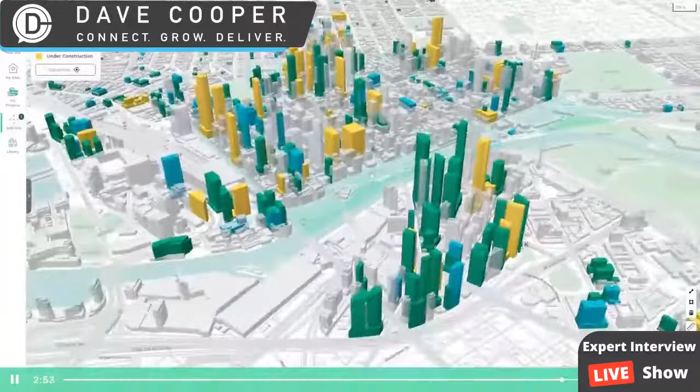Hey, so this is what we're going to see, and you're going to design it just as quickly as we did in that video, right? 100%, probably faster. Well, before we jump into it, Dr. Ben—that's what I'm going to call you, Dr. Ben. I was saying, do I call you Doctor? Do I call you Ben? Do I call you Dr. Ben Benjamin Coorey? But you said it doesn't matter to you, and that's what I love. You're a humble person, and you're a lot of fun to talk to.

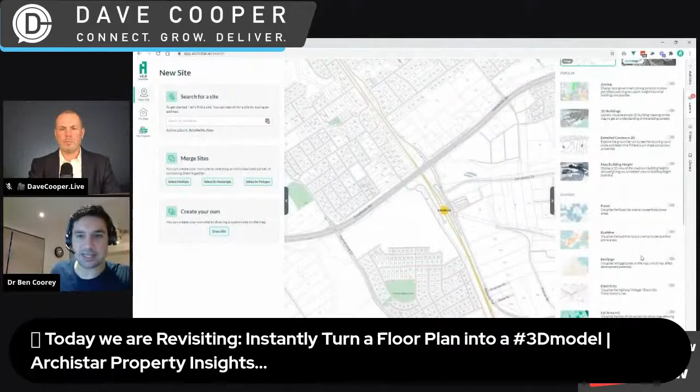So from that, what we've done here with this data visualization is, it's really an open platform, and at the moment we've brought in key data sets that we think are useful at this stage. But based on the feedback of our clients, what we've been doing is...

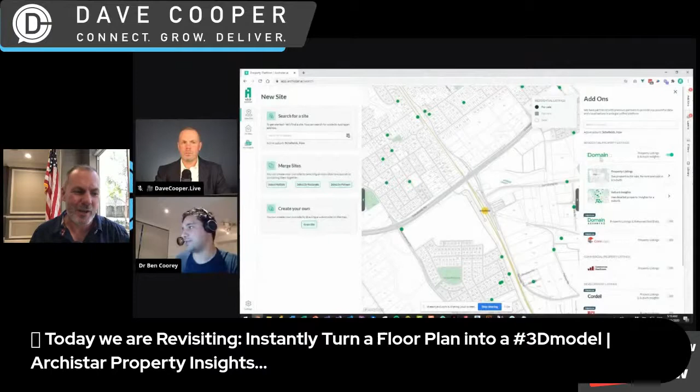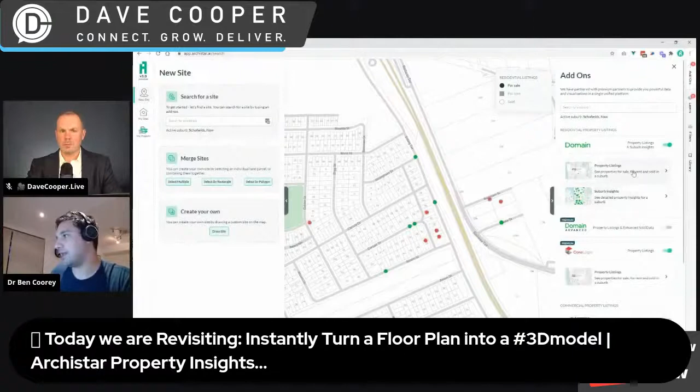Once it's done, we bring in all of these data layers, and we're looking at the equivalent data sets in the US - real estate portal listings, so you know exactly what's on the market. You can grab suburb insights on the spot and see what the median sale price is, how that price has changed over time, how many apartments or houses have been sold. All of this information is at your fingertips.

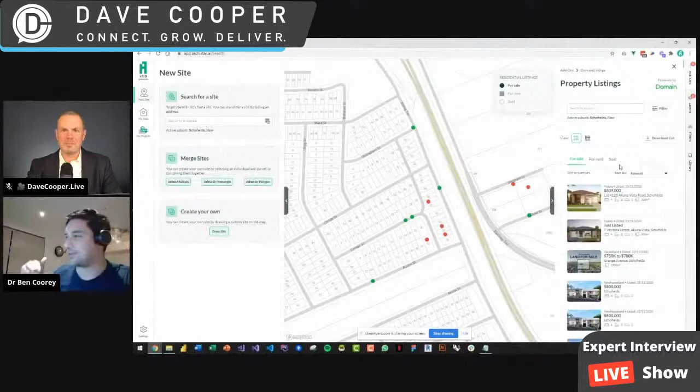We're data nerds here as well - we design, but we love data. Bringing up this data and looking at it in tabular format, exporting it, searching, filtering, working through this - if you're getting into property development, or if you're experienced looking at a new area you haven't looked at, this stuff is critical. You're seeing the date properties have sold, how much they've sold for, what's on the market now, what's for rent, what's been sold - you're becoming the expert in these areas, and learning how to develop there.

The more information you've got here, the better. There's information about the market, information about development activity. If we pull this up, you can start to see straight away what's been approved around your site, and this is super important. If you click on any of these, you can see a development site, residential or commercial, what's been put up there, what's been approved. Here's another development site - a mixed-use development, 242 units, 5 stories of retail, and the value of that property.

So this is all the activity happening around you, and that's super critical, because what you want to know is the settlement risk. What's happening around you - if you're going to develop somewhere, are there already 10 commercial buildings popping up around you? Is there stuff in the pipeline you need to be aware of? Bringing that data together really brings market activity, development activity, and zoning activity all into one spot.

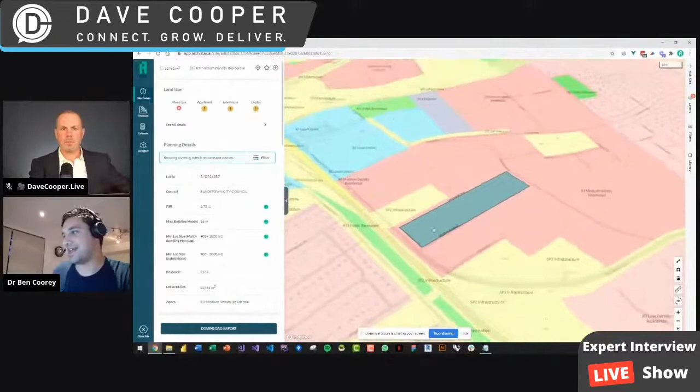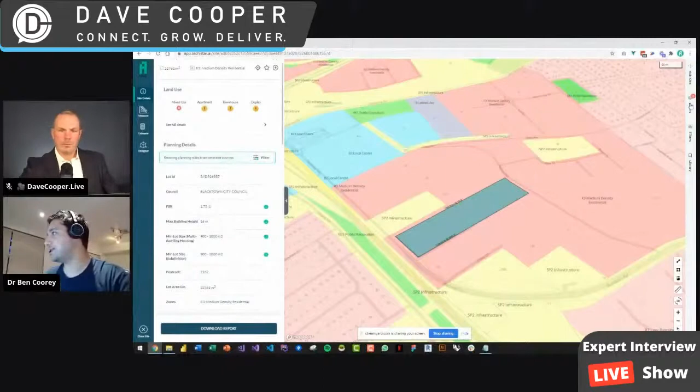I think that's the part which is different from other generative design companies—we've powered you with all these data sets. If you're looking for a site, we've got powerful filters so you can say show me everywhere I could build townhouses or apartments, and it'll show you exactly where you can do that. So let's go to a suburb and turn on where we could put apartments.

If you look here, there's apartments, and this filters on where you can put townhouses, where you can put apartments. You can use this data to really filter and say show me sites that are between this lot size and that lot size—straight away going in here.

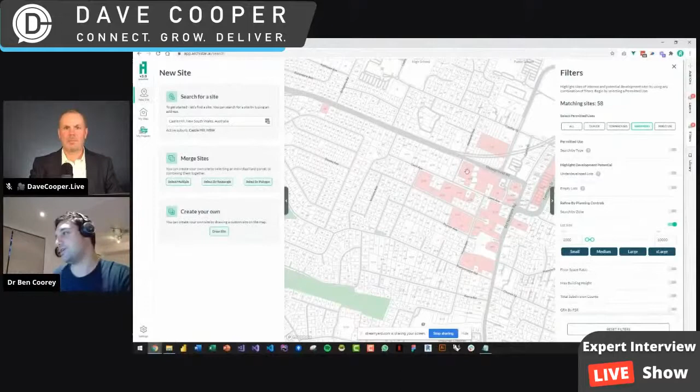The beautiful thing is one of our add-on partners is an aerial imagery provider that gives you up-to-date, super high-res aerial imagery. These are opportunities available for zone for apartments, and you can see a lot of these are already done. But if we go back to that filter and say show me the smaller sites—bang, straight away you see all these little sites here.

These sites haven't been built out yet, which is really cool. So you can say, look, these have all been built out as apartments, but look at all these opportunities around that I could potentially develop too. Really powerful, combining the data and AI to find sites—combining those planning rules with powerful filtering and an AI engine so you can get this up and running and identify those sites quickly.

So now, taking that first part of the process—can we use data to find sites and generate designs—the next bit is, well, what do we do with those sites and what can we do there? So I'm going to come to some examples over here.

Let's look at this one here. So here is a site next to a train station. Transit-oriented developments are all the craze now, so what can we do around here next to this train station? We've got all this open land—what can we do here?

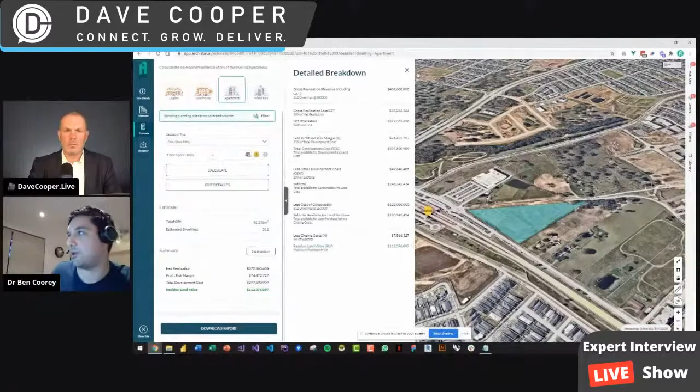This is your Excel sheet that, with some basic planning rules, lets you immediately put in the cost of the development, the revenue you're going to make, and you end up with a residual land value—how much profit you want to make, how much you could purchase that land for. So the back-of-the-envelope sketch is digitized now: you put your rules in, your costs in, and you've got that straight away.

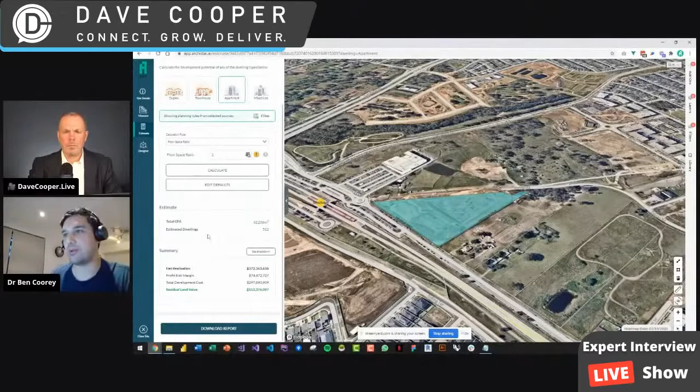But where the real power comes in—and this is where my PhD and all my work came into it—is the designer button here. This is live, this is instant, this is what we've got in the platform. We've got a team working on design strategies every day, populating this and adding more and more typologies. If you look here, these are all the different typologies we do.

Let's pull up a nice commercial option here on the train station and see what's possible. Basically, you hit generate, and these are all the options you can play with here. You'll see this come up, and you can mess with these parameters—this is the whole point of generative design.

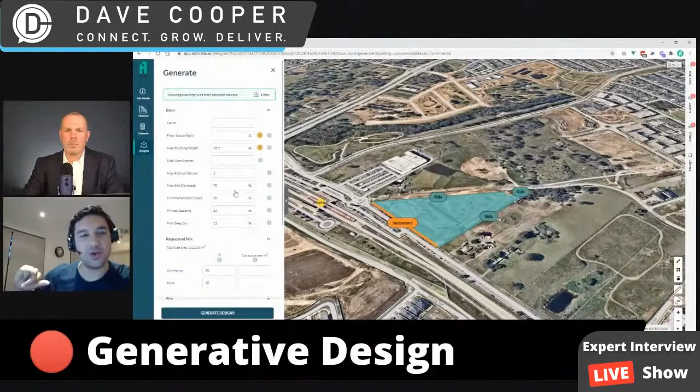What's the maximum building height? What's the number of podium stories you want? How much site coverage, how much open space? What's your privacy spacing? What's the mix between commercial and retail? What are the offsets? We populate these with planning rules—you see a tick if it comes from the planning rules—but you can mess with these and change them on the spot to test out different options.

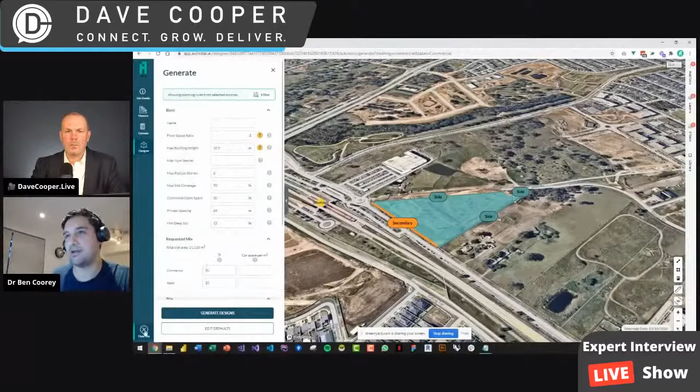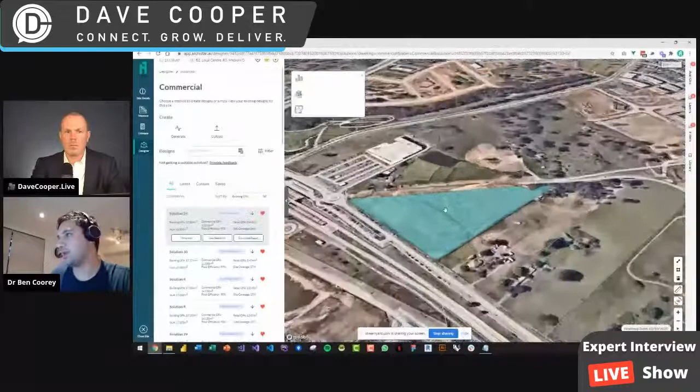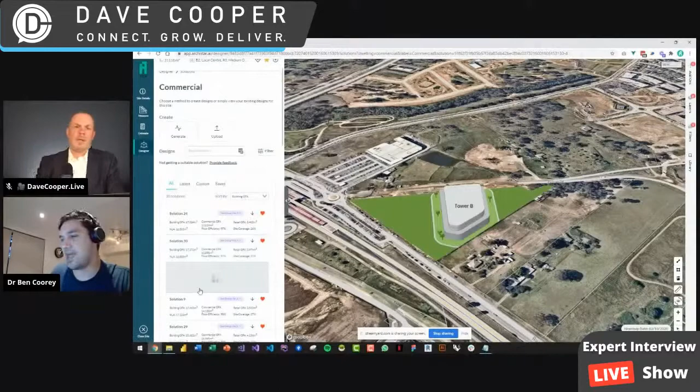So if we go to that and we generate some designs, you're going to see it load up some solutions working through here. Straight away you'll see designs popping up, and immediately you can start cycling through them based on the settings you've done.

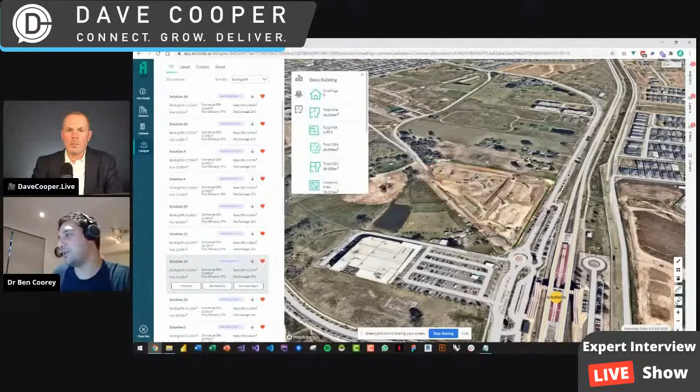It's going to test out a whole range of different options and show you how that will fit. You're working from the street frontage, trying to see how this works, and it's giving you a whole range of options that really start to show what's possible. For all of these designs, we go further and show you the inside.

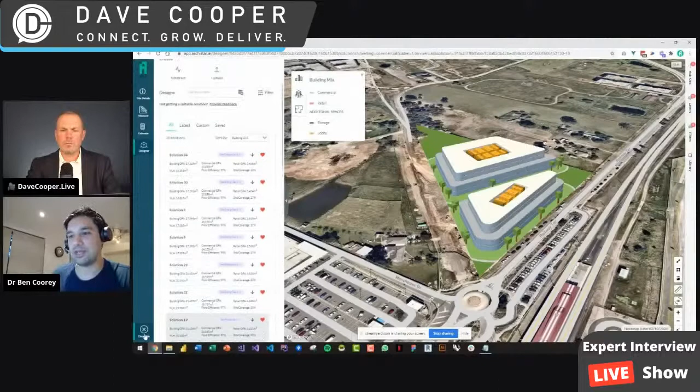So when we're generating this, you've got that concept level, but we're designing further. We're designing the lift cores, the corridors, the facades, and we've really got that level of detail where you can design in there, and go into feasibilities and get your lot schedules and all of that out straight away.

And if that's a commercial site, we work on so many different options. Here I'll show you another site, and you can start to see what's so powerful about this engine is these sites are crazy shaped designs. Look at the shape of these sites. Our parametric engine handles all of those different shapes, and that's what's made it so difficult.

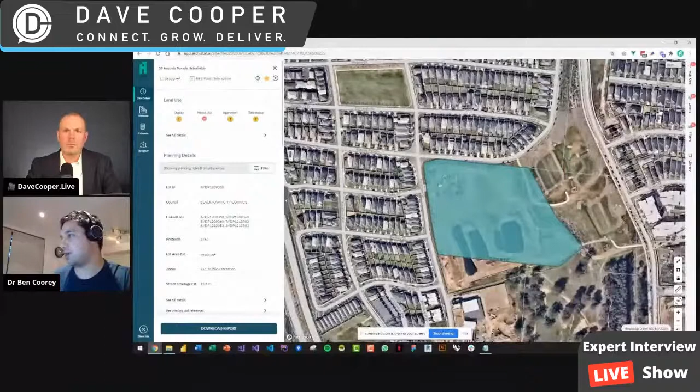But here's a nice open paddock, in a bit of subdivided land. You go over to townhouses and start generating that, and we come up with solutions that meet and wrap around that site. It handles the geometry of the site and comes up with these solutions instantaneously, with a lot of options.

Going down this list, there's a whole range of different approaches to how you would do that. At the click of a button, you've got these options, and all of these townhouses and house designs are to the exact spec that you've said. This is the right GFA that you want. You're getting variation in, but you're thinking about the site: what are the rules, how big do the roads have to be, and how many lots can you get there.

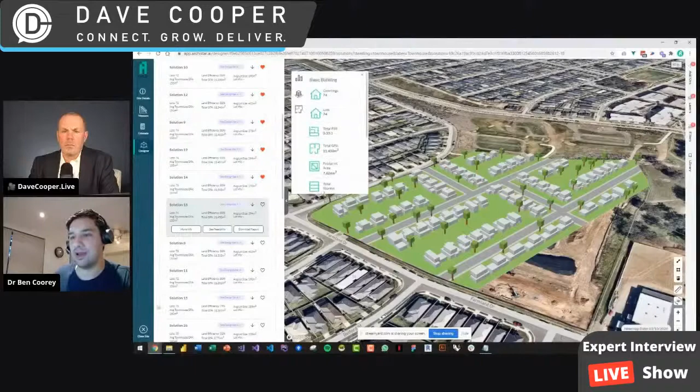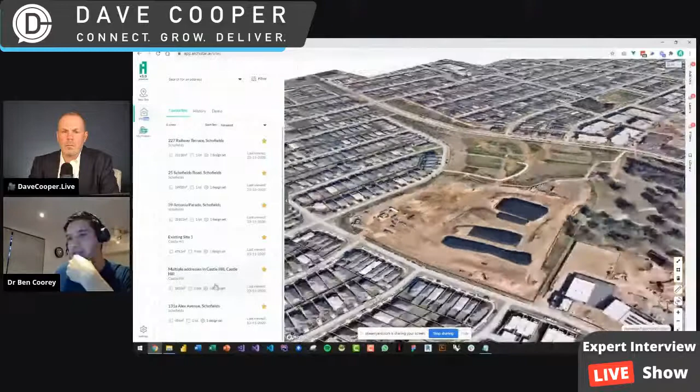Instantaneously. And I'll show you one more before I move on to something else. If we go to the apartment generator...

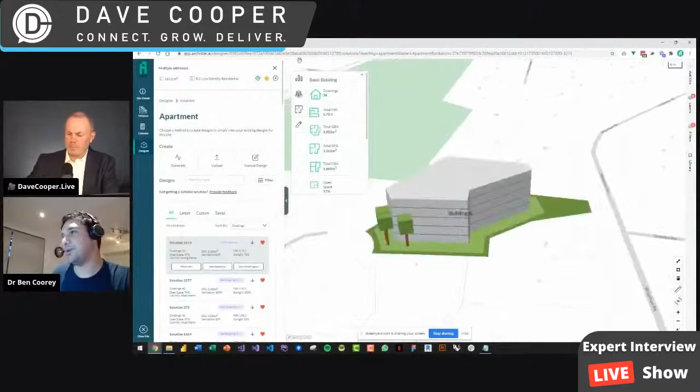This one is really cool, where you can now start to actually analyze all these options you get. This is super cool. So if you go into the apartment generator, you can look at that building mix and see those individual apartments in here, which is super awesome.

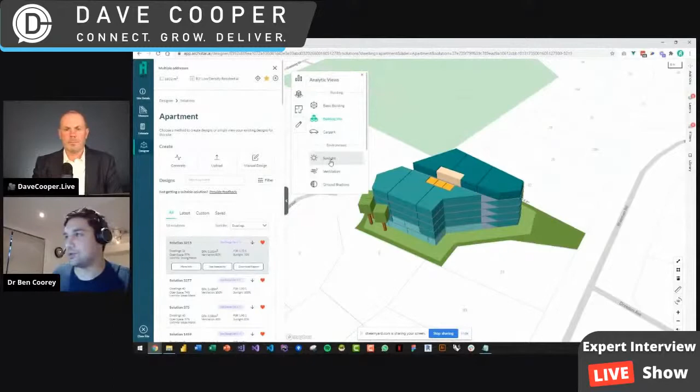But this is the cool part: all of these designs are analyzed for solar compliance and ventilation. So if you want to know which is the best option for how much sunlight they're getting, every one of these condominiums or apartments, we're telling you how many hours of sunlight each apartment gets and what that percentage is. These are calculated on every design instantaneously.

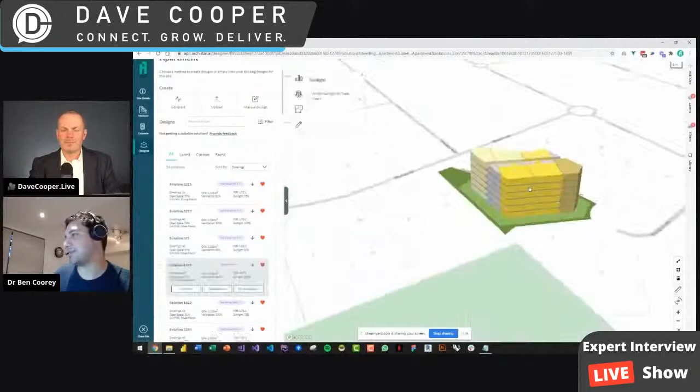So you're looking through these options and seeing exactly where the sun is coming from, seeing which ones work better. As you're working through these, you're not only getting the best mix from a feasibility point of view, but you might think, oh, I'll just put up a straight tower here, but these apartments get no sunlight at all, so maybe this is not a good option for you.

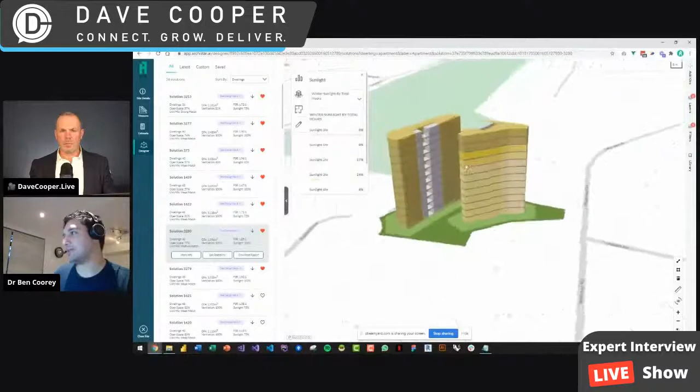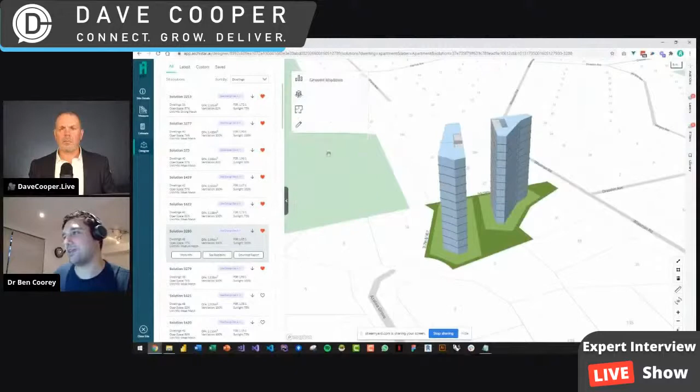So you're really working through really crazy innovative designs that our team keeps putting through. These are fully cross-ventilated designs. You can see shadows, and you can put on the existing buildings around you to see if you're overshadowing those buildings, and how this fits into the context.

So straight away, any hour of the day, you're going to start to see exactly where I'm shadowing. So yeah, it's a super powerful tool, and it's getting even more powerful every day as we do it.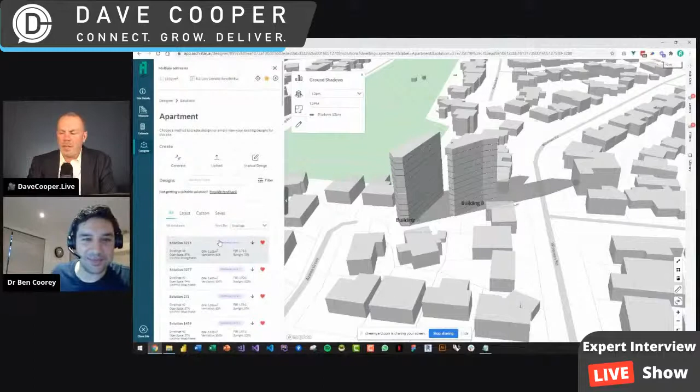So, to sum this up a little bit, Ben, I don't know how you keep all this data and this thought process in your head. It's a massive undertaking, the information you guys have put into this. But I'm going to ask a pretty simple, basic question: how do you get all this data in there from the zoning and regulations, all the town planning data? This has to be a pretty big undertaking, because you're literally letting people stay in their house - all of a sudden it makes me a zoning officer, an architect, a civil engineer, a plans owner at a very low level, of course. I know you still need those professionals when you get further in. Walk us through how you come up with some of this information.

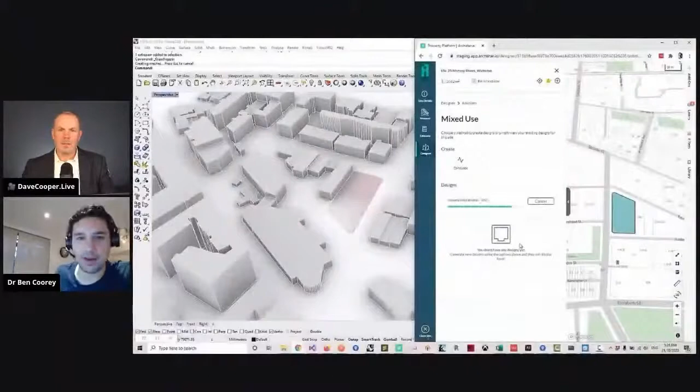Yeah, and I'll show you—this is like new footage just coming up. It's a good time to segue into that. We're very much about how do we integrate into the workflow. And I'm an architect by background—I teach technology in our academy.

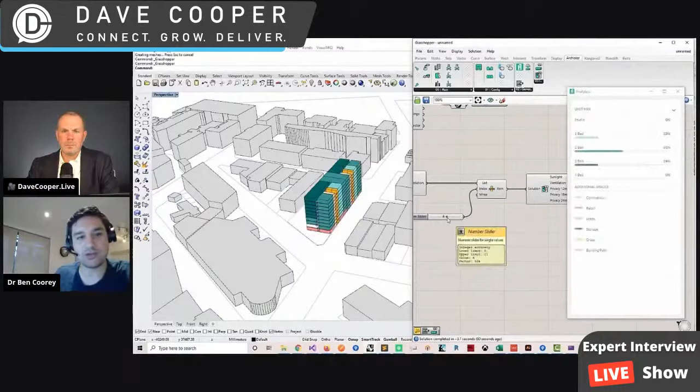So we've built this as a Grasshopper plugin. We're doing one for Revit and Dynamo. Essentially, anything that you design in Archistar on the web, you can stream that straight into Grasshopper or Revit and take it from there, start modifying it, and then push it back into Archistar for analysis.

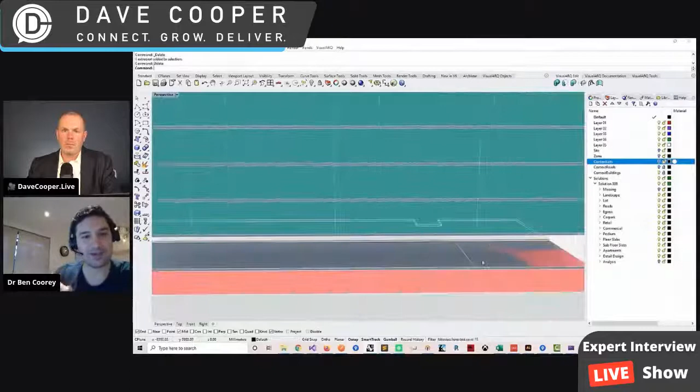And I think this is critical, right? Because whatever we come up with in Archistar—it's AI driven, it's generative design, here are examples—but if you want to really get in there and customize that, change how that looks, and really kind of take it to the next level, we allow you to take those designs almost as examples or concepts and then modify that and really change it. I think this opens the door to strong collaboration, and a lot of people say, how are the architects involved in this? How are the planners involved? How are the engineers? This starts to bring that together.

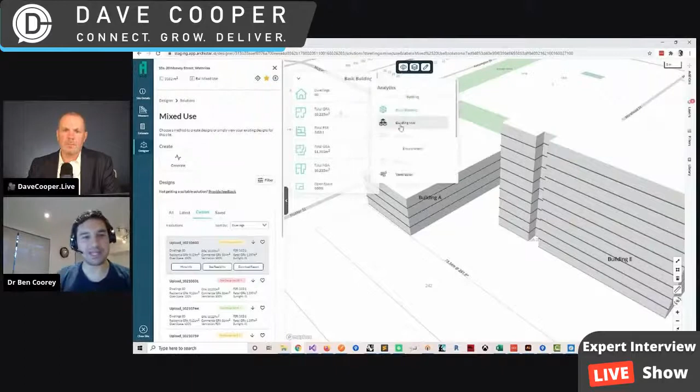So it's like, all right, here are your concepts—bang, bang, bang, I'm 80% of the way, but how do I then work with my consultants? Because you're not going to get a full design finished on the click of a button.

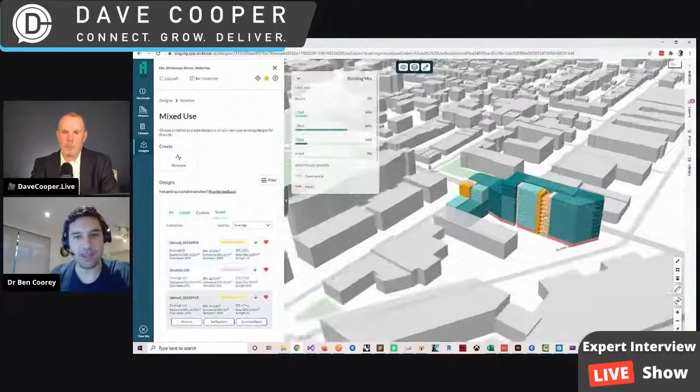You're going to get close to the idea that you want, but can you then take that out and work with your consultants to come up with that final scheme that's really tailored in? It takes into consideration all the different factors, and how fast can we do that by allowing that collaboration to work. So yeah, 100%, that whole idea of working into that workflow of the process is super important.

Wow, that's super cool. All right, let's keep going through some comments here. Jamie Parr, Joel Hutchins, nice loaded question. Mr. Revaya can help you with that. Yes, he can. Everybody doesn't know Joel. Joel is working on his own parametric and design stuff in the cloud, which is great, great, great. Did I get that right? Parametric, Joel? Watch, he'll give me a hard time.

All right, so we've got Tom ready. Are you able to tie in the takeoff estimates for bidding or costing, and also the production and build schedules?

Yeah, 100%. So with all of these designs, we've got all the geometry, we've got all the information, we've got all the metadata. We can recreate that in BIM, we can recreate that in Rhino or any CAD software. We also pull out some basic data from that straight away. So if you want to know your GFA, if you want to know your dimensions, your lot schedule, we can pull that immediately. We can tie that into a feasibility calculator so that you can use that data to start estimating straight away. But I guess as we progress further and we get more of those details coming in, we can start to look at those build schedules and build quantities.

And at the moment, it's still that kind of conceptual level. So massing, we get down to more schematics of the unit mix and the corridors and the lifts, but we've got tests and experimentation of going down to walls, windows, doors, floors, but yeah, that's still in the works. Well, it's still very impressive, that it's even a consideration on top of everything you've already done. So I think that was a great question.

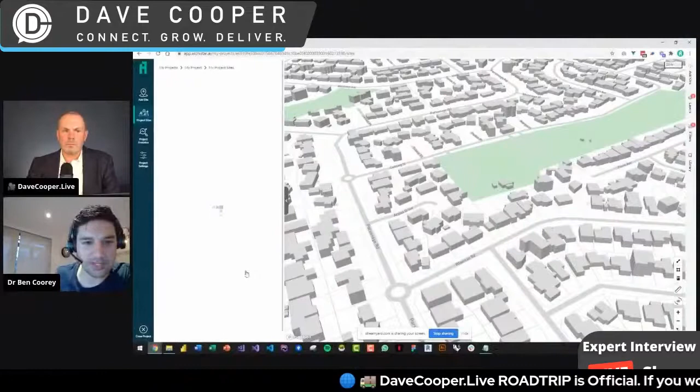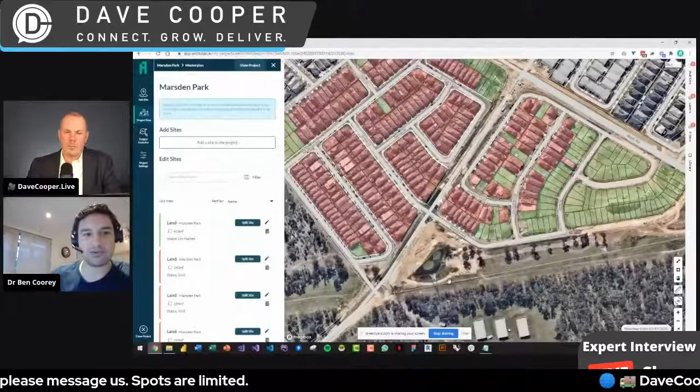We started going into, I showed you before we could do subdivisions and we could do those community estates. What we've really started to do now is started to work with the large home builder community and developers that are taking large estates, and they're looking at the process for how do we start to take this system and use that in the selling process, and can we speed up that process and encourage a richer experience there and faster sales here.

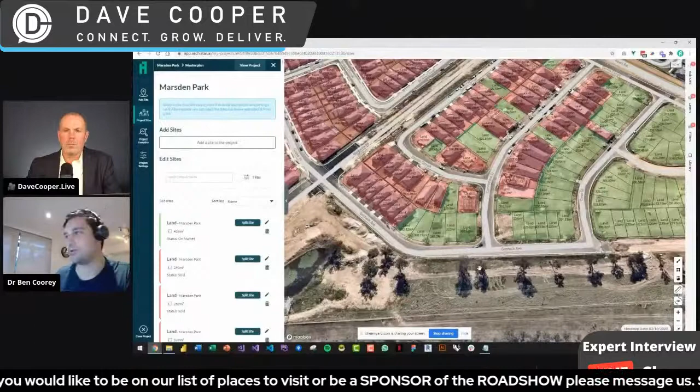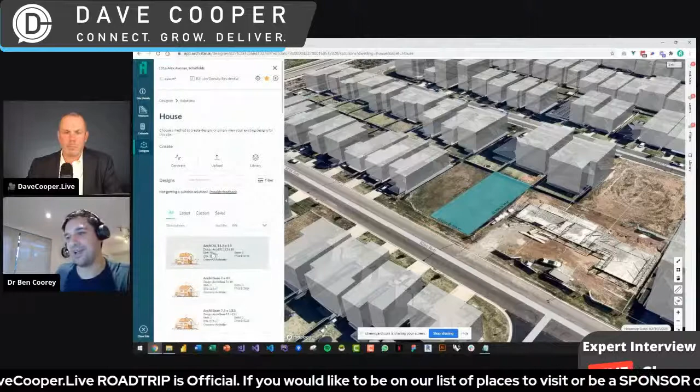So what we've got here is we've got a community that can be managed on the site, so you can see the designs that are being built, what's still available on the market for sale, what's been sold. But what's really cool about this is that you can now start to bring in not just that conceptual massing technology, but you can actually start to bring in real house designs that are 3D, that are visual, and that are fitted to the site.

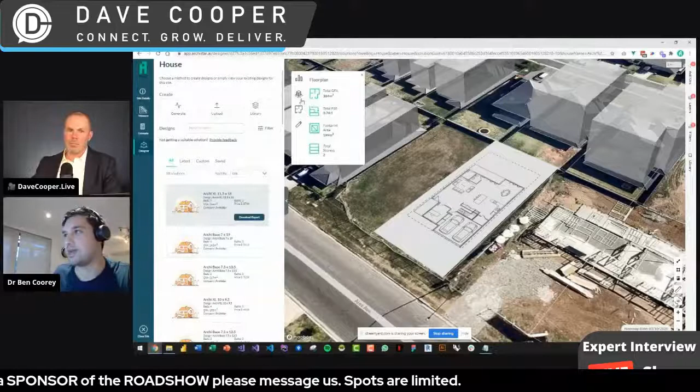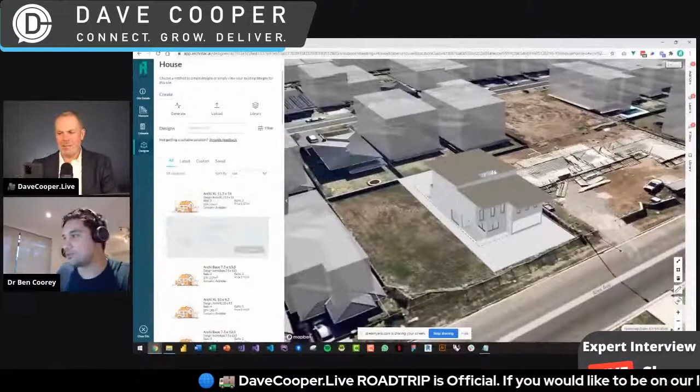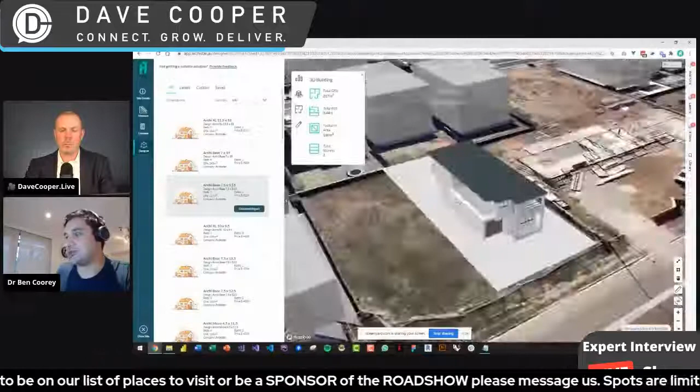So what you'll start to see here is that we take into account the planning rules. And if you've got a library of designs, of home designs that you've worked on, and you've got that catalog, we can upload them and we can actually fit them in so that out of all the designs possible, you can only choose the ones that fit into the design and are suitable for that site. So this has been a really powerful tool, and especially in Australia, where you do have a lot of choice on what home design you want on a piece of land, and you can often pick from a library of designs that a builder may have.

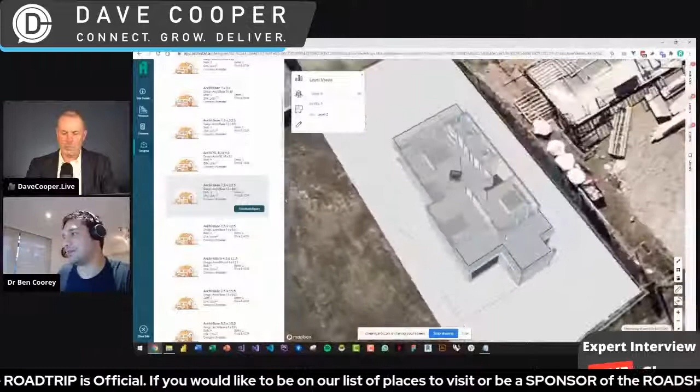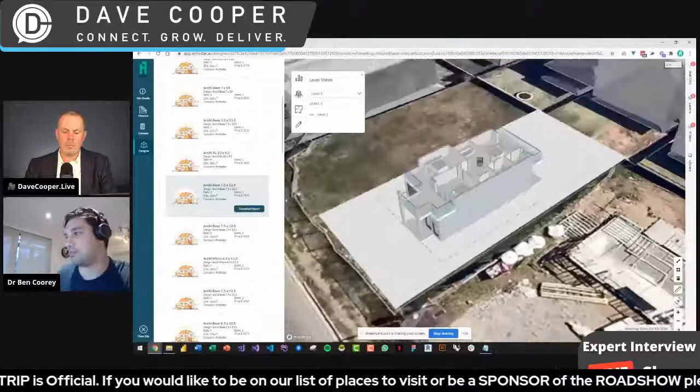This is really changing the game here, where you can fast track that, allow the control for the customer to really kind of get in here, explore the designs that they want, pick what they like. And even if you've got a large community, it may be as simple that you've got a few options to pick from. You want to pick that particular site, test out what options there are, and bang, I like that. So we're finding that this is becoming very useful as a sales tool as well. Once you've got your development done, can you start to work through that sales process and involve the end client into this? So there's a bit of a consumer play here, which is super cool.

You just keep adding on. I don't know, man, do you sleep ever? You just keep adding on. It's about 4 a.m. here. I think if you're a founder doing something global from Australia, I think sleep is out of the question, right? I know, so well, you know what, lack of sleep causes hair loss. I'm just telling you from experience.

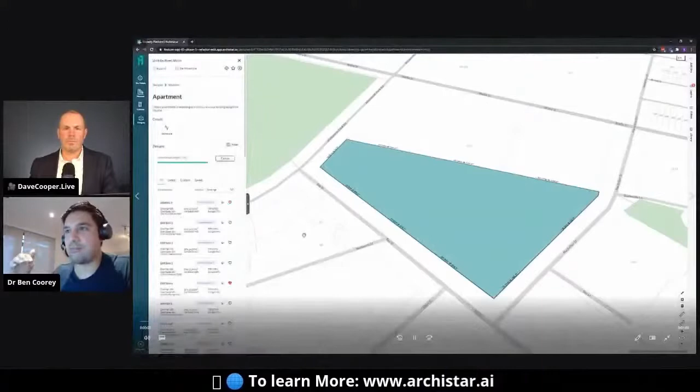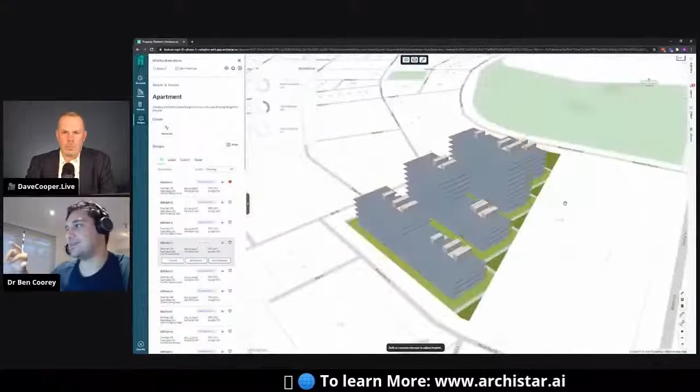This is going down that path where you can come up with ideas out of the box, kind of auto generate, but how, as an architect, can you now start to mess with these designs? Can you change them, can you delete them, can you really tailor things to the context and use the power of that AI to recalculate those solutions and come up with a better thing? Maybe you don't have enough sunlight and you want to adjust it and try out new solutions. It's this rapid prototyping and testing, combining that form finding, that concept building with the grunt of the computer to calculate all the other stuff, which I think is the message.

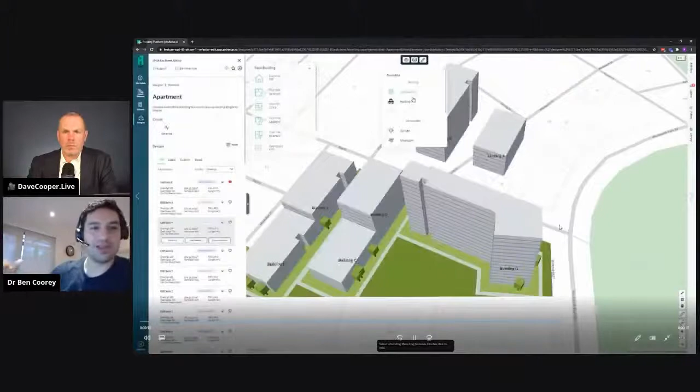This goes down to the level of detail of editing the unit types of an apartment, changing the width, making it single loaded or double loaded - there's a lot of control we're giving access to, to really fine tune things. So I think it should supercharge that creativity rather than stifle it or stop it. It should make it much better.

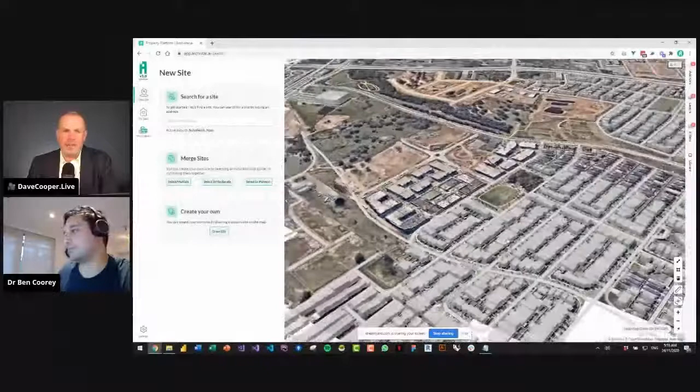It also helps with something we haven't talked about yet - the sustainability side of this, the value of knowing where the sun is in the design and where the shadowing is, for more energy efficient buildings and more energy efficient layouts. Yes, 100%, that's right - out of all this, you should have more creative buildings, more sustainable buildings, more thoughtful buildings, because you can now look at 1,000 options, and there's really no excuse not to get it right.

You should be testing this out and really kind of taking it to that next level. Yeah, for sure, for sure.

We got another comment come in here. Lori Ford says her focus is on large scale master plan community with a mix of residential, commercial, recreational uses. Due to the project's complexity, zoning needs to be negotiated with the jurisdictions, which is super challenging. This tool could be a great way to communicate alternatives and even create a collaborative effort with the jurisdiction.

That is a comment that has so much weight in gold, because it's exactly it. Now you have 7,000 designs to show somebody if they didn't like the first one, right? We even get government organizations that have sites or precincts they need to rezone, and this is like an excellent what-if tool. What if we did this? What if we did that? And you've got the power of the speed of this, you've got that ability for the analysis of that.

I haven't shown it, but it's something we're working on, and we've got a beta version of it. We call it projects. It's essentially precinct planning, where you don't just work on one site, but multiple sites, and you could have mixed use, different types of buildings there. But if you've got so many options just for one site, imagine for a precinct how many options you could do, how many ways you could tackle that.